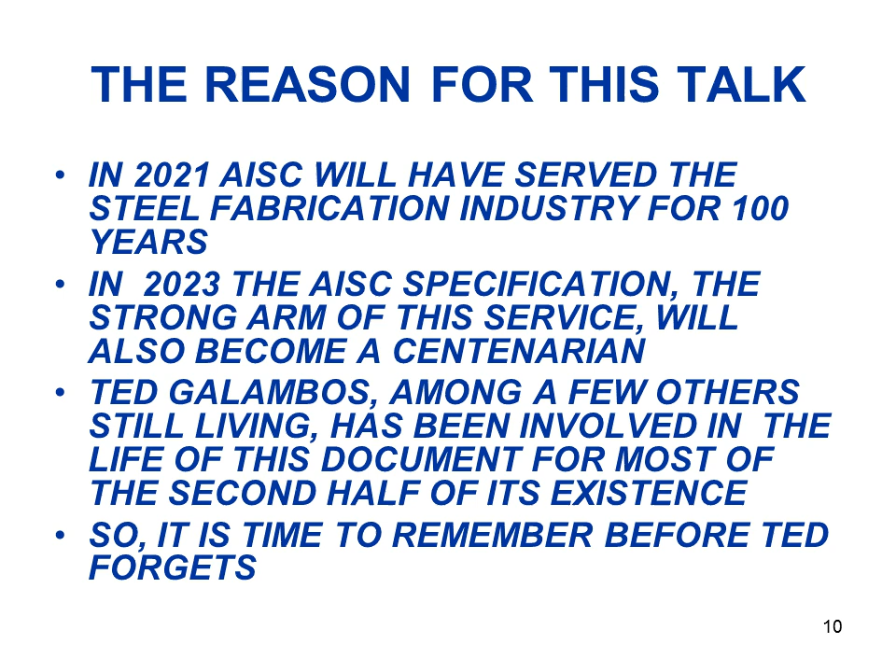As you can see, the time is creeping up on me, but I'm still smiling.

The story starts on September 1, 1956, when I reported as a graduate student at Lehigh University to Lynn Beedle. John Fisher and I met at 8 o'clock in the Fritz Lab parking lot and reported to Lynn Beedle immediately up on the 5th floor of Fritz Lab. And that began my involvement with the AISC specifications.

The reason that I was selected for the graduate work was that in my resume they found that I could speak, read, and write German. And they needed the translation of the recently appeared German buckling specification in preparation for a new AISC specification, and I guess a background for introducing effective lengths. So here I am, somewhat of an institutional memory, an old guy trying to remember.

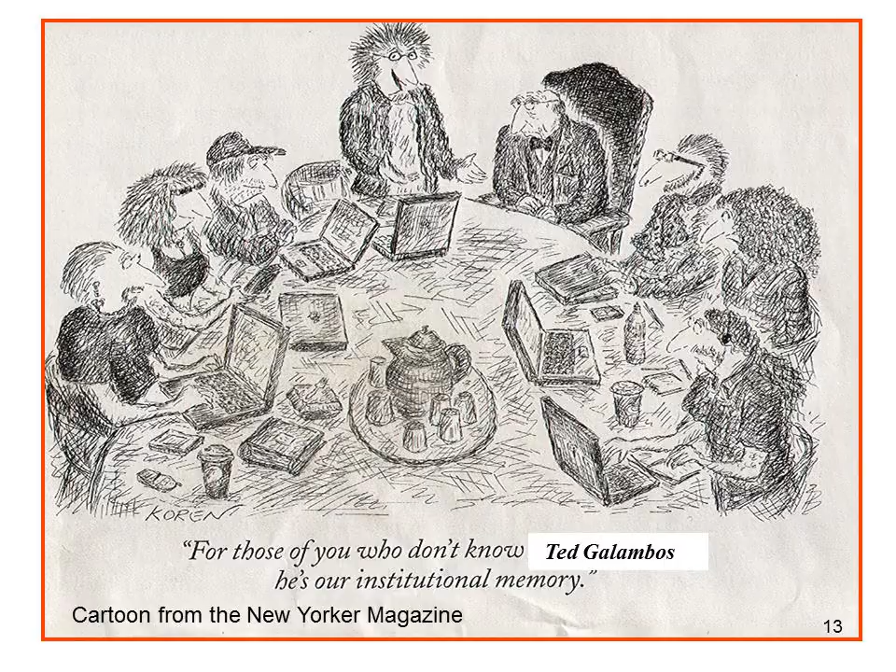Now, why was it important to have a new specification? It was an important fact because the Secretary of Commerce wrote a very nice letter to AISC on the formation of the institute, and this was Herbert Hoover, who eventually became president, and he was, of course, also an engineer. The inaugural meeting listed the following objectives: the establishment of a single code authority that would be recognized by building code authorities and designers to eliminate the confusion that existed in the construction industry caused by the numerous and different manuals, each containing proprietary information.

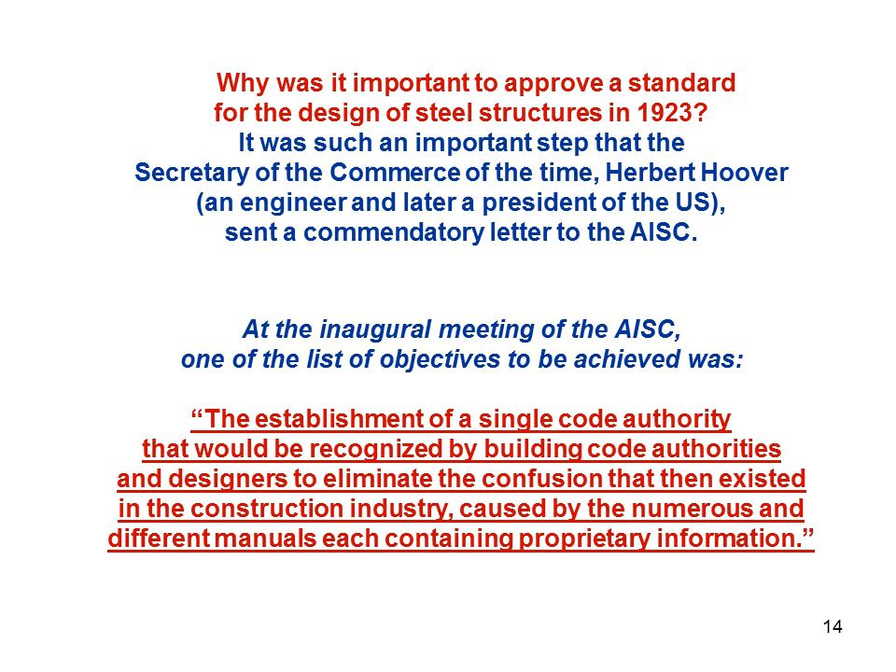Somewhere in my voluminous library, I have a whole number of these. The first AISC specification was a pretty little document contained in a little pocket volume that had 23 pages, and it contained the steel design spec, the ASTM spec, and design aids. The actual spec was 9 pages, and it cost 25 cents. So it was a real deal.

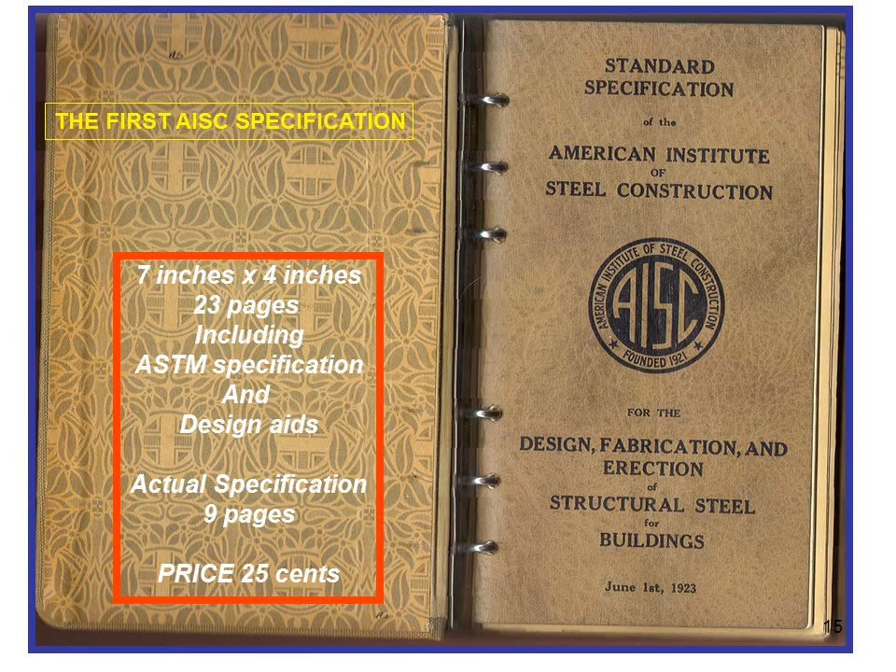Now, the specification was written by 3 groups of people: 2 professors, 2 structural engineers, and an architect. And I think the further developments with an advisory board for the specifications kind of represent the same kind of a distribution.

The specification was, in today's language, I would say, a true performance-based specification. The requirements for a satisfactory structure were: the material must be suitable, of uniform quality, without defects affecting the strength or service of the structure. And the computations and design must be properly made so that the unit stresses specified shall not be exceeded, and the structure and its details shall possess the requisite strength and rigidity. I wonder if we really would need any more than this.

Now, at the time this was written, a lot of things that we now know and use had already been developed. The mathematics was already in place over 100 years before that. Theory of elasticity was 30 years before that, and a lot of the theorems, Betti's principle, and all of those things were known. So we were not talking about starting into the jungle from the beginning.

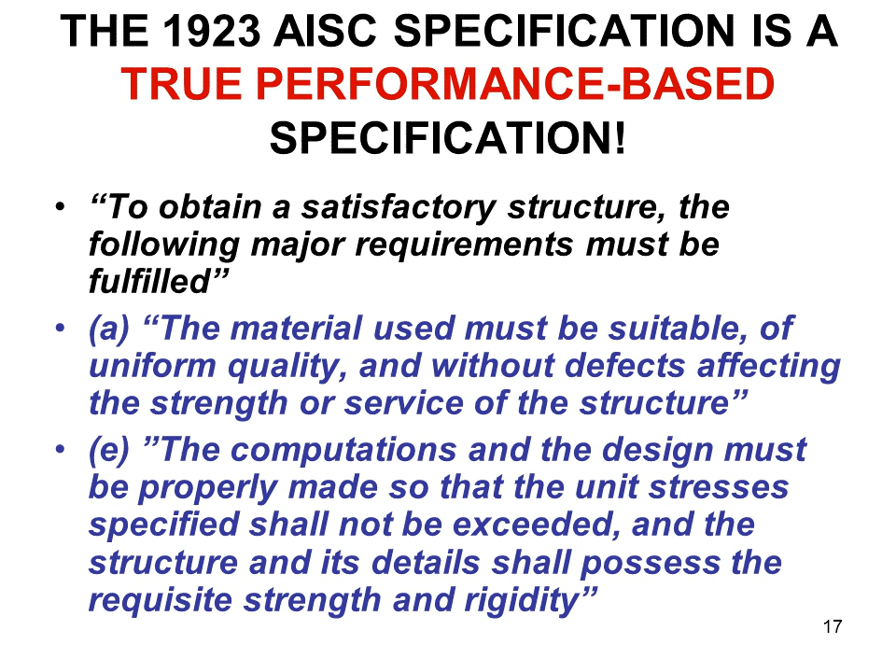The major headings of the spec are very familiar to what we have now: beams and girders, combined stresses, rivets and bolts, connections, lattice, minimum thickness, and so forth. So the outline was already here for what we now have in our specification.

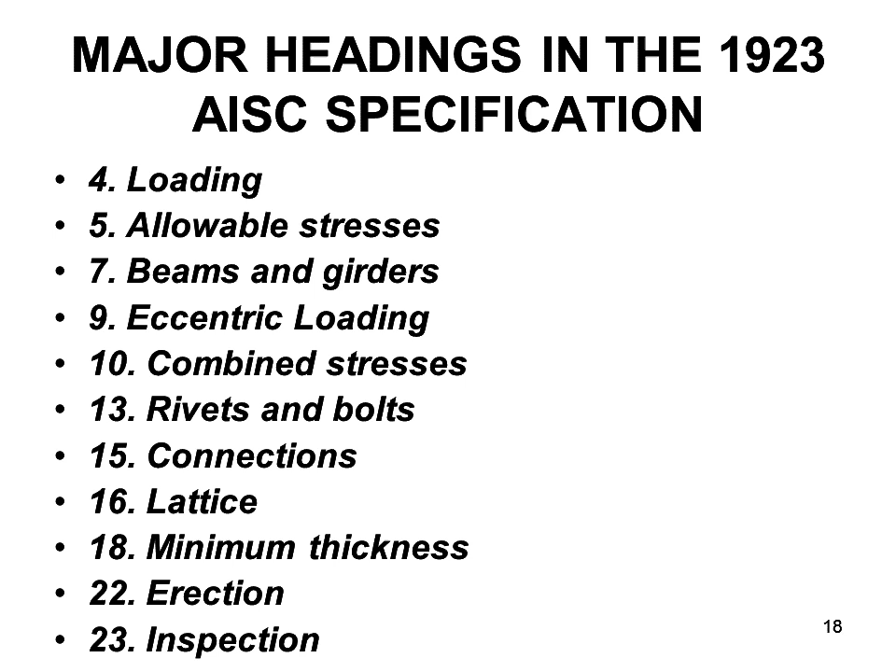About 7 years later, the AISC put out its first manual, and it contained the specification, but it also contained a lot of tabular materials for cross sections and sort of a textbook explanation as to why some of the rules were in the specification: beams, columns, and so forth. This cost $2, and it was 476 pages long, so it's not that much different from our present manual.

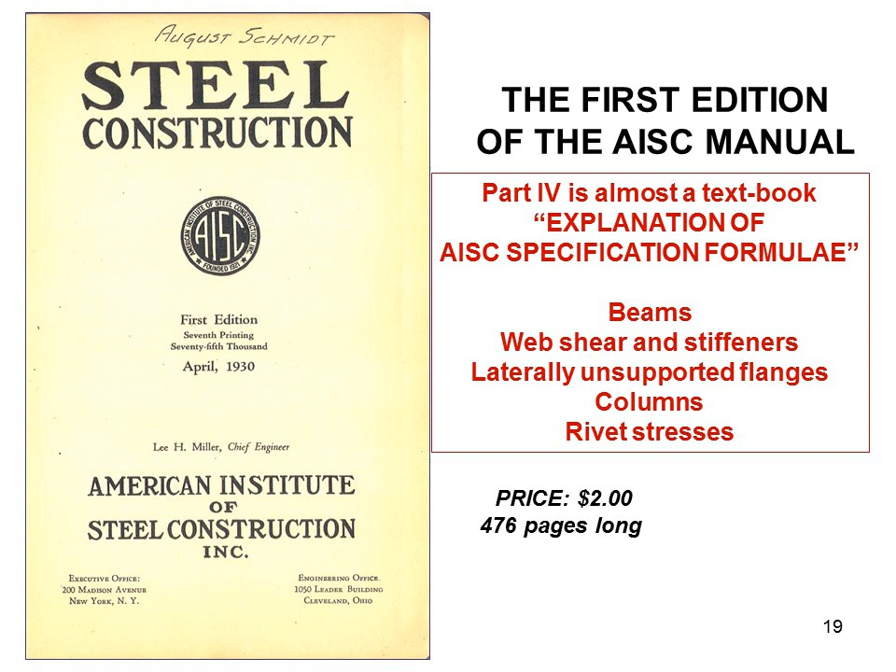Well, it's about half the thickness, okay?

The main argument for a new specification was that everybody did what they thought they wanted to do, and the main problem was that there was a bunch of column curves and column formulas in use, and depending on where you are, the strength was different by about 10 KSI. The book says very clearly that the diagrams clearly illustrate that the basic unit stress is not a consistent index of the so-called factor of safety. You can already see that they called it a so-called factor of safety. This carried over into a lot of other things that were used in design.

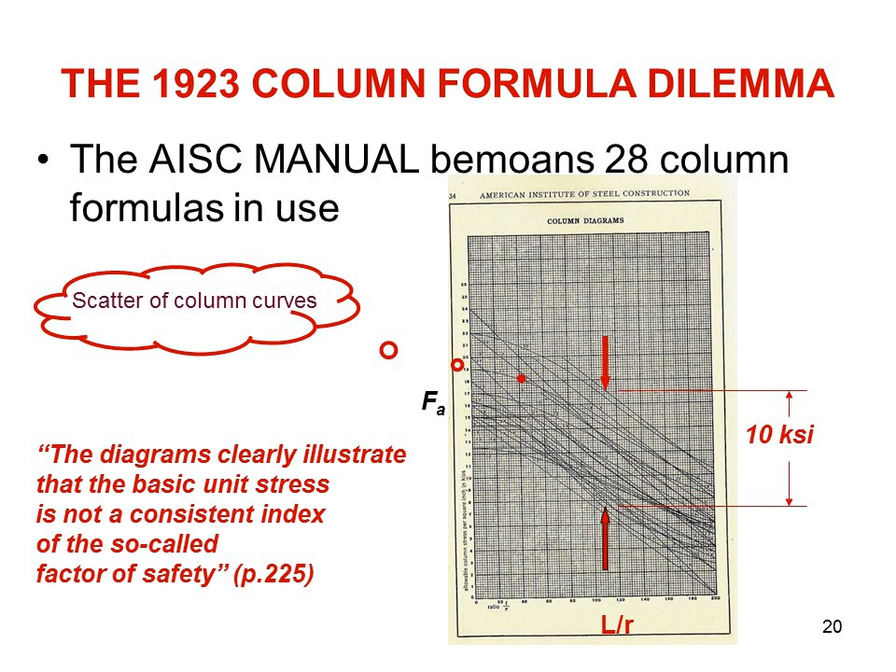Let's look at the development of the column formula that was used. The first column formula is shown here, and it was in use maybe pretty close to 50 years. It was developed first in the middle of the 19th century in England by Rankine, and the limit state was the attainment of first yield of a column with initial imperfections. Below an L over R of 60, you didn't worry about column strength, but worried about local crippling. After that, you have this column strength.

If you would scoff at the idea of this as a limit state, I would like to tell you that the limit state that the European column formula is based on is exactly the same limit state as was produced by Rankine in the 1850s, and it certainly does not reflect the work that was done later on to the tangent modulus solution and the nonlinear behavior.

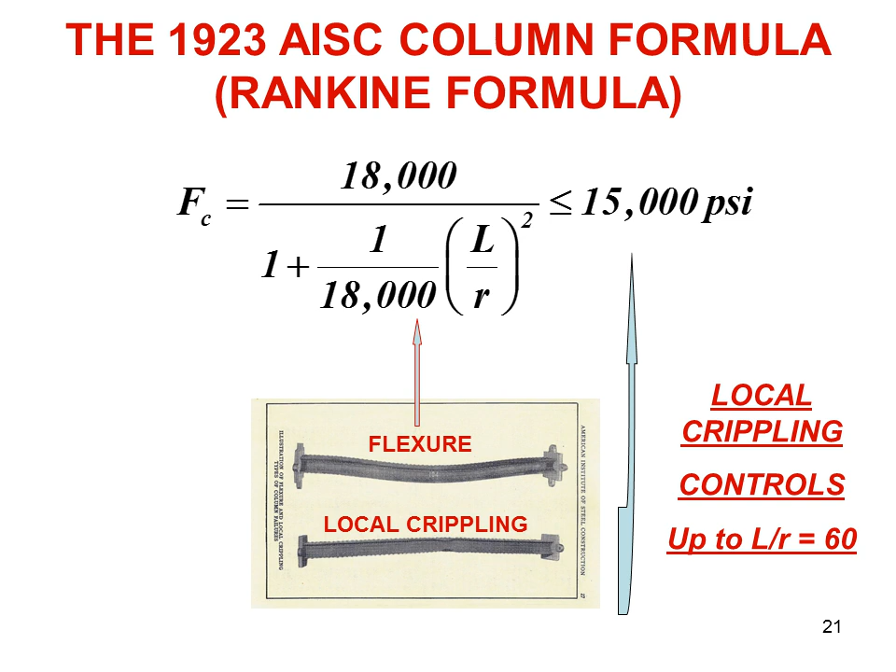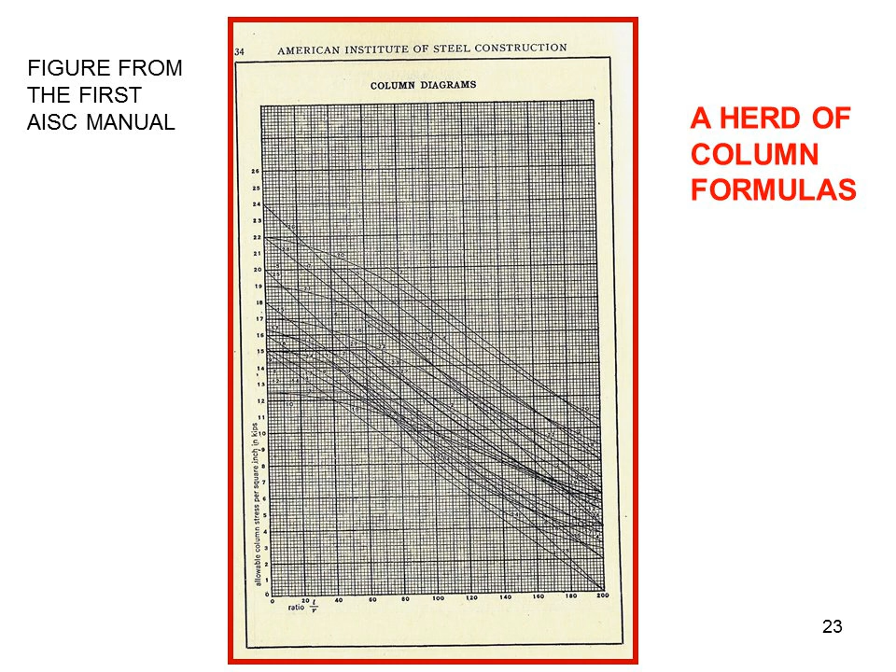Here you have just a picture of the two columns. They're all nice riveted columns and look kind of interesting. And here you have a bigger picture of the herd of column curves. Just imagine how much fun it was to teach that.

Now, the major changes in the specifications are shown in red here, and the changes were due to the need for new technology, new practices, new research.

In 1961 to 63, there was a radical change. I say 61 to 63 because the 61 specification had some things that had to be corrected, so the 63 specification in the light brown cover is the one that really counts.

This was a radical change because a large committee was formed and locked up at a resort in Michigan for a week. I wasn't part of this because I was still a little too junior for this. But this is where the research that had been done previous to this time in the 1950s and earlier at Lehigh and at Illinois was then put into the specification, and also to the chagrin of many, the idea of effective length was introduced.

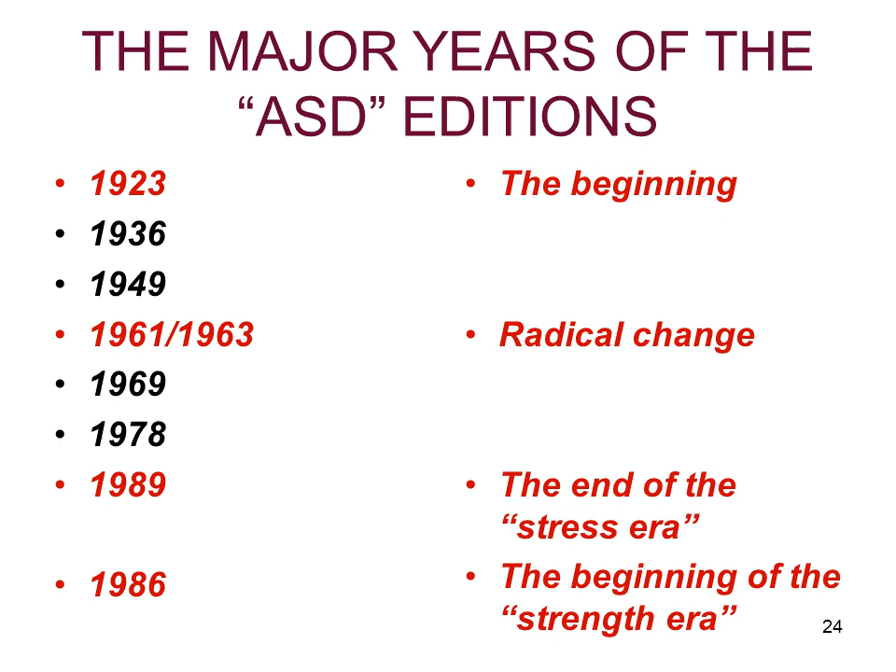And so I think slender is beautiful. The committee members are basically constant in number, and they're pretty much evenly distributed between professors or researchers, and fabricators, manufacturers, and consulting engineers. This is a very august group, and it meets twice a year, and its subcommittees meet more often. The main feature of this committee is that it's a consensus committee, everybody has to sign off. There's no possibility for saying well, 90% think this is safe and 10% don't. Well, this is not going to work.

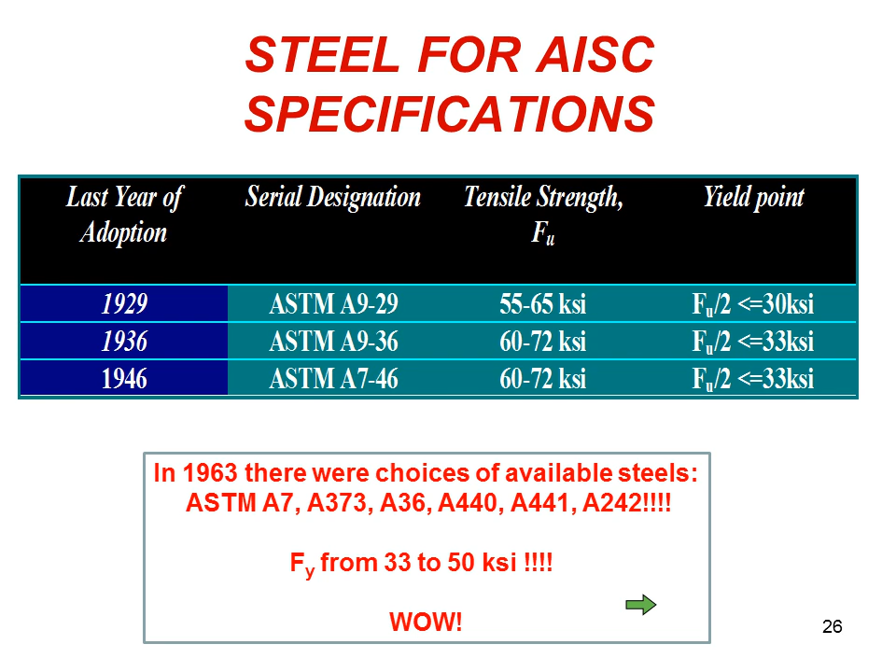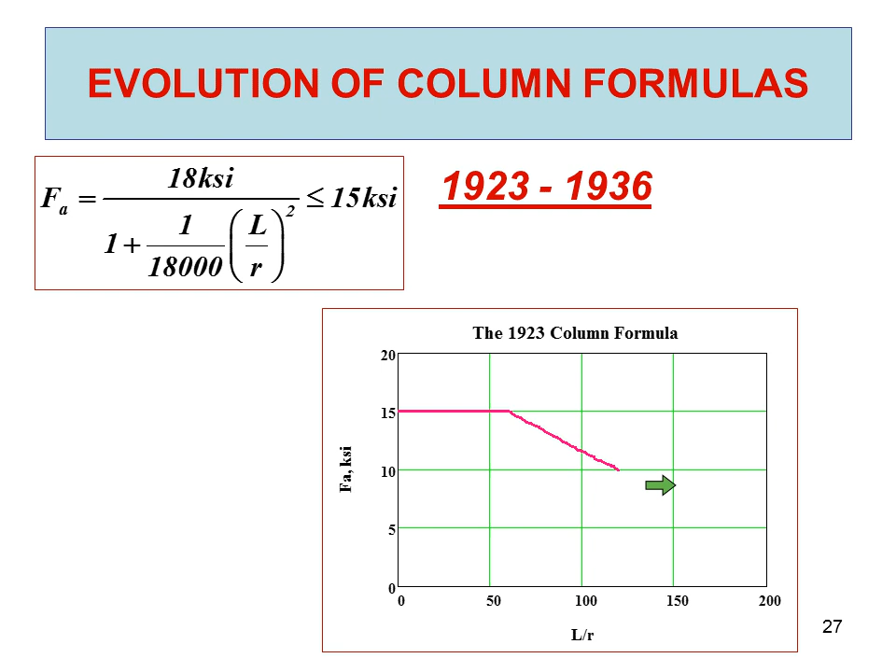So that was a very big introduction in '61. This is the column curve, as I talked to you before, and it was from 23 to 36. It was a very simple two-branch curve, and then this was changed in '36 to '61.

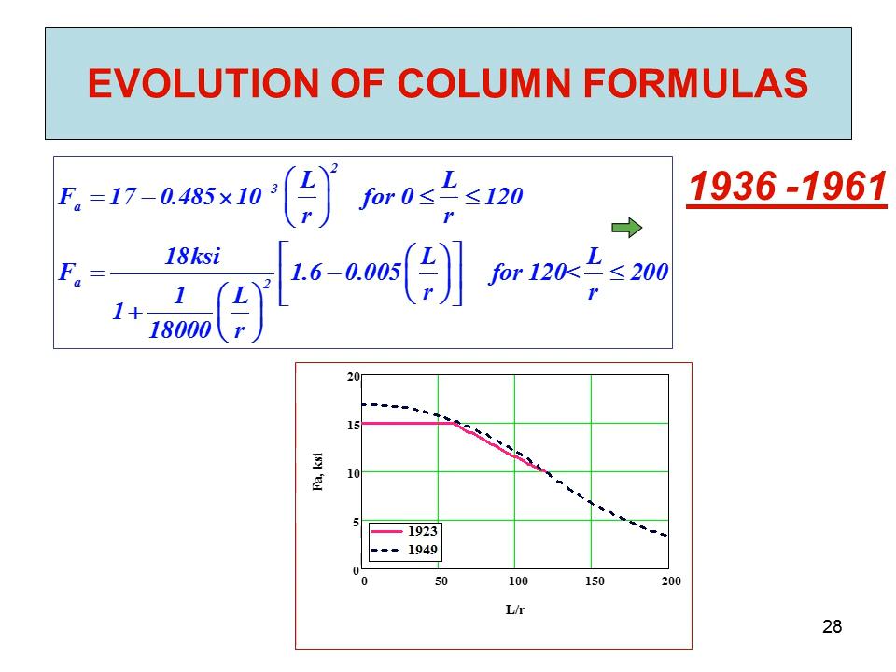This is what I learned when I was an undergraduate. We have a sort of a parabola for L over R less than 120, and then we have the Rankine curve with a little input, a little ice cream put on it. So between 120 and 200, and we called this secondary members and this primary members. Now we've gotten away from that, and we don't do secondary and primary members anymore.

That's the basic member that was used, and this time it wasn't just a formula cooked up by researchers - there was also a pretty extensive experimental program that went with that at Lehigh University. So this took care of the material nonlinearities, and in hot rolled steel, this was the residual stresses.

The factor of safety varied from 5/3 to 23/12, and it was supposed to empirically take care of initial imperfections. The origin of 23/12 is pretty obscure, but maybe it could be found in the book of Numbers in the Bible. I don't know. But that's where most of us learned and taught.

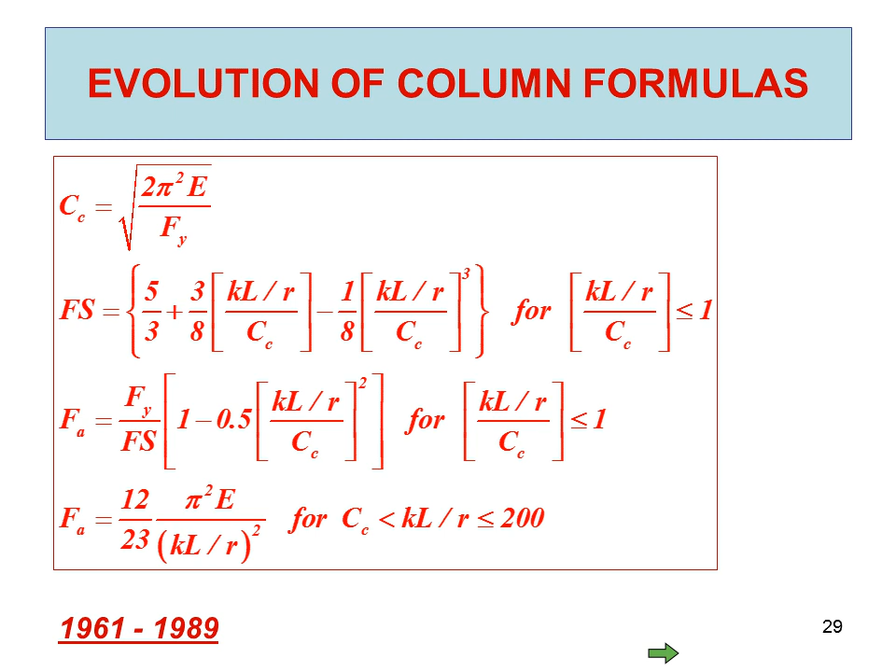Now here you see the comparisons between the 1936 and the '89, and then our present column curve. The present column curve takes care of both initial imperfections and the residual stresses, and it is based on research that Reidar Bjorhovde performed for his PhD thesis at Lehigh. It is the average curve for all of the tests that were performed and then reanalyzed. The simple formulas we ended up with are due to Ray Tide, who came up with the formulas we're using. So that's where this is.

Column curves, of course, are very important. They are like a flag in a country - a new country always starts with getting a flag and then getting a column curve. It's also very important to note that the British had a different philosophy and different column curve in 1939, and the Germans had again something very different, and they went to war with each other, and you figure that out.

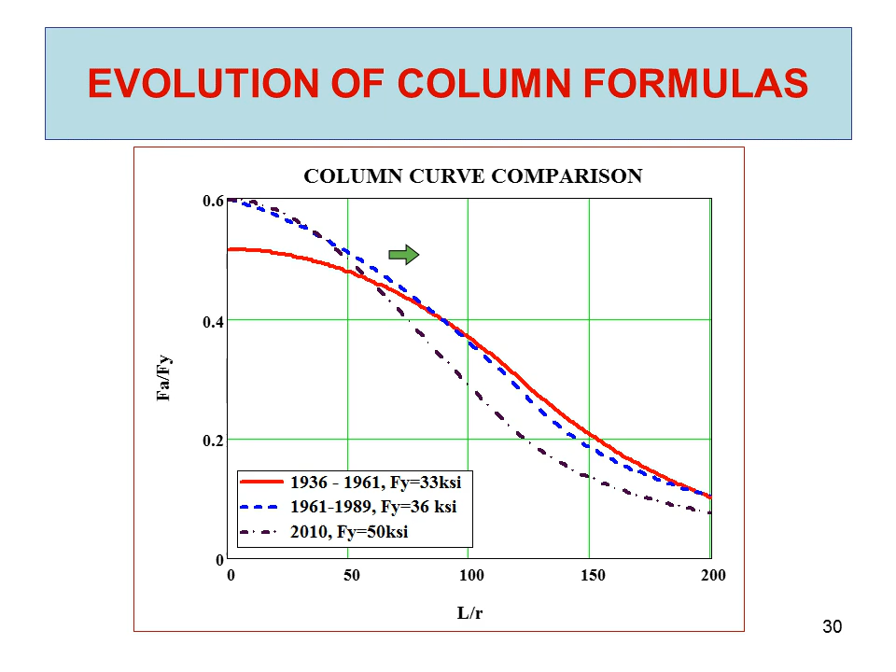Okay, now let's look at lateral torsional buckling rules.

It started out with the Rankine formula with a little bit increased beginning allowable stress. Then it was increased a little bit more to have more confidence in what was done.

And then in 1949, a new column formula was introduced, and that's the LD over BT formula. This was as a result of research conducted by Carl de Vries at Bethlehem Steel, and his paper in the AISC specs, the AISC Structures Journal, is quite an interesting version of exercise, and it's quite convoluted, but he came up with what turned out to be one of the right parameters.

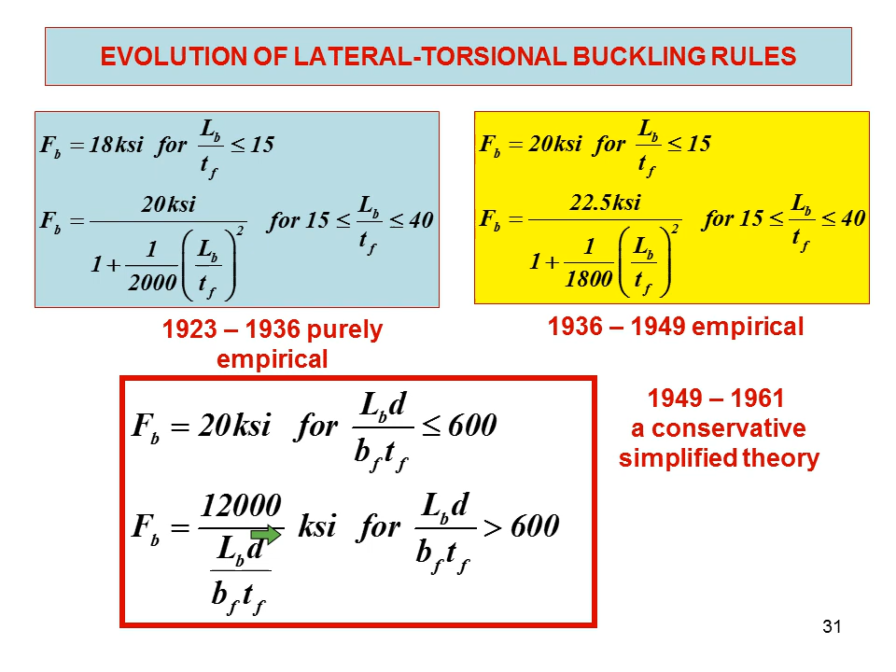And the result was that we really had a very, very conservative situation on our hands.

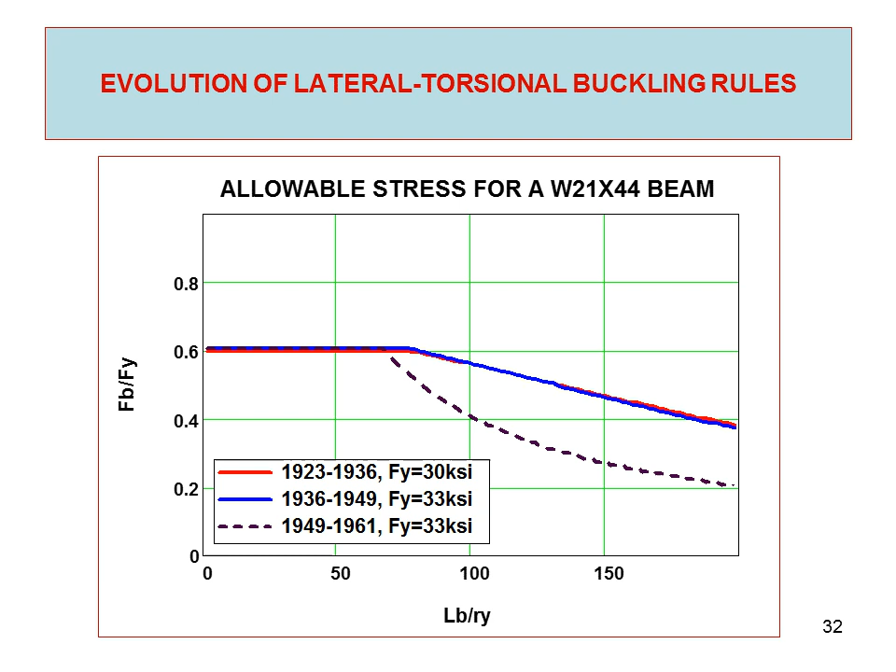Now our friend George Winter at Cornell University, he was a member of the AISC Specification Committee, and he was very, very astute and had this gruff old Austrian accent. And he said, now just wait a minute, Timoshenko had all of this figured out a long time ago. And he referred to Timoshenko's book in 1936.

And here you have the elastic buckling formula that we are now using. Some of the numbers were substituted in there, and so but this is it. And you can take this apart into two stresses, the St. Venant buckling stress and the warping restraint buckling stress. And if you do a little cooking around and substitution, you get these two formulas.

This is the Euler formula. This is the LD over BT formula. And if you just take that and take 6/10 of it for the yield stress, there you are. George Winter was very kind to point this out to all of us.

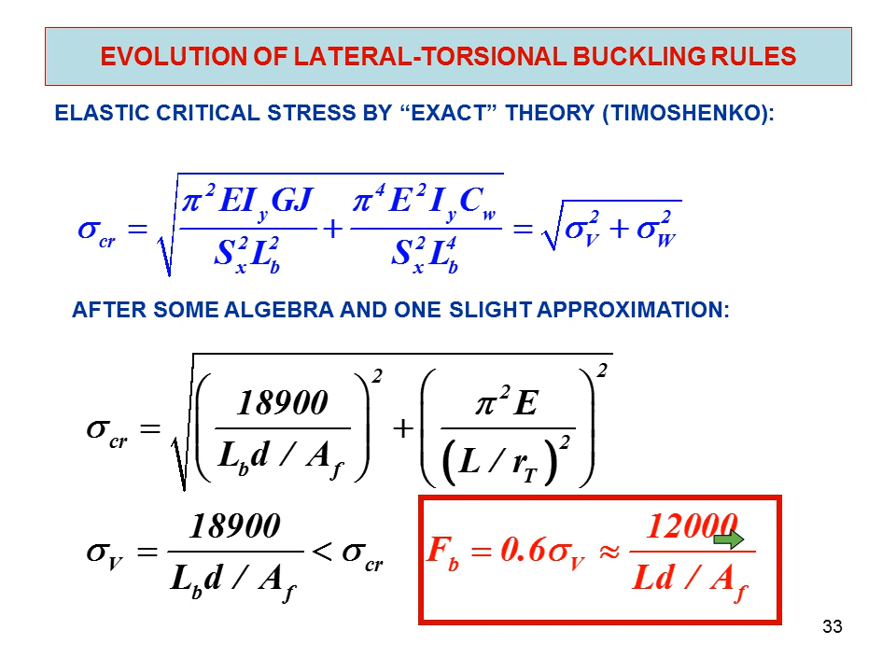Okay, now this was then put into the new equation, a new specification in '61, and here you have the LD over BT formula, and here you have a parabolic formula, and then we said, okay, we'll take the maximum of these two, which will be less than the square root of the sum of the squares.

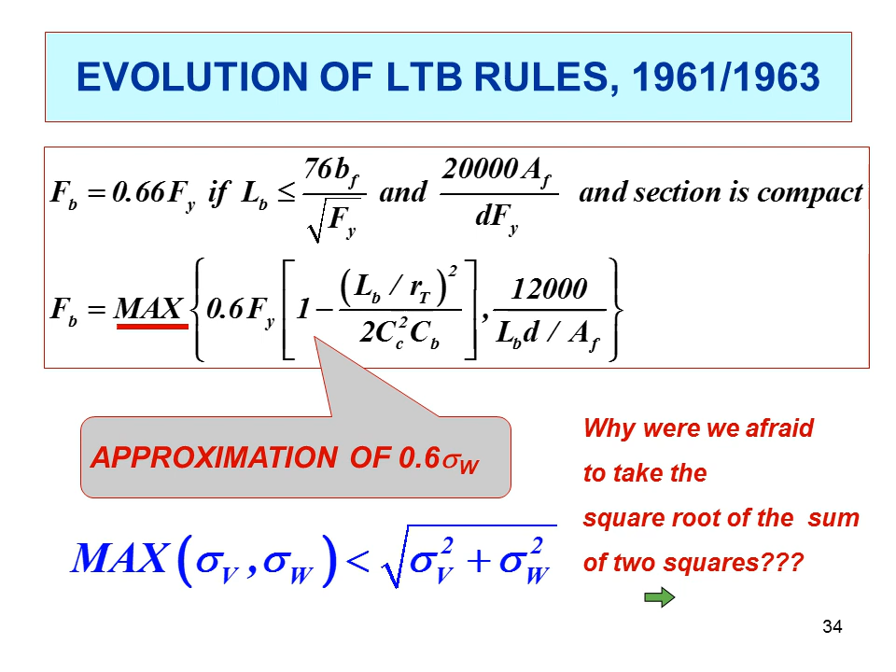So why we were afraid to do that, I have never known, and it was a heck of a difficult thing to convince students that now this time you use the maximum rather than the minimum. And you know, the slide rule would have done this very nicely.

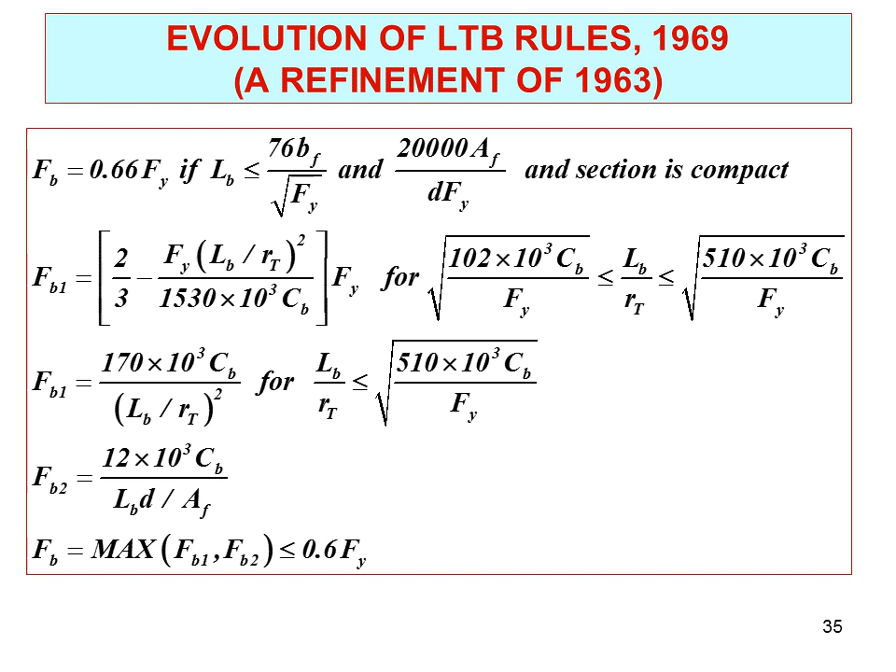This was then further extended and evolved, but it still stayed the same until 1989, and it was changed in the 1986 LRFD formula, and of course we're not using this anymore.

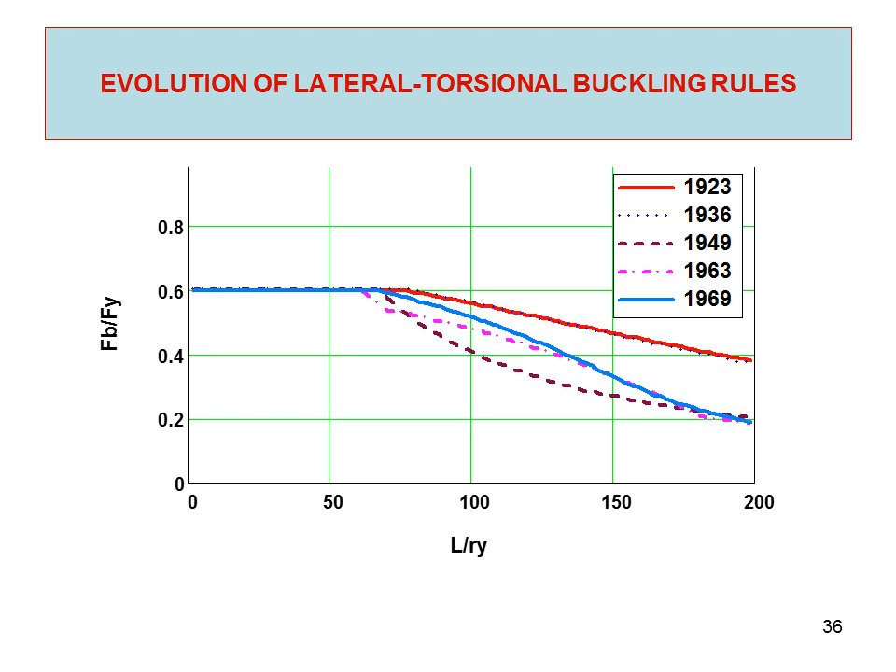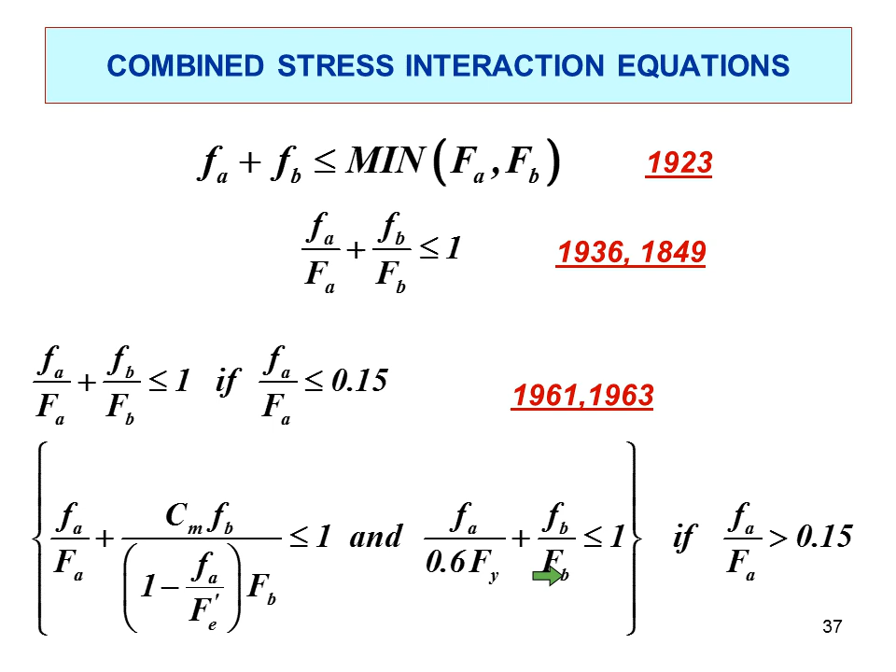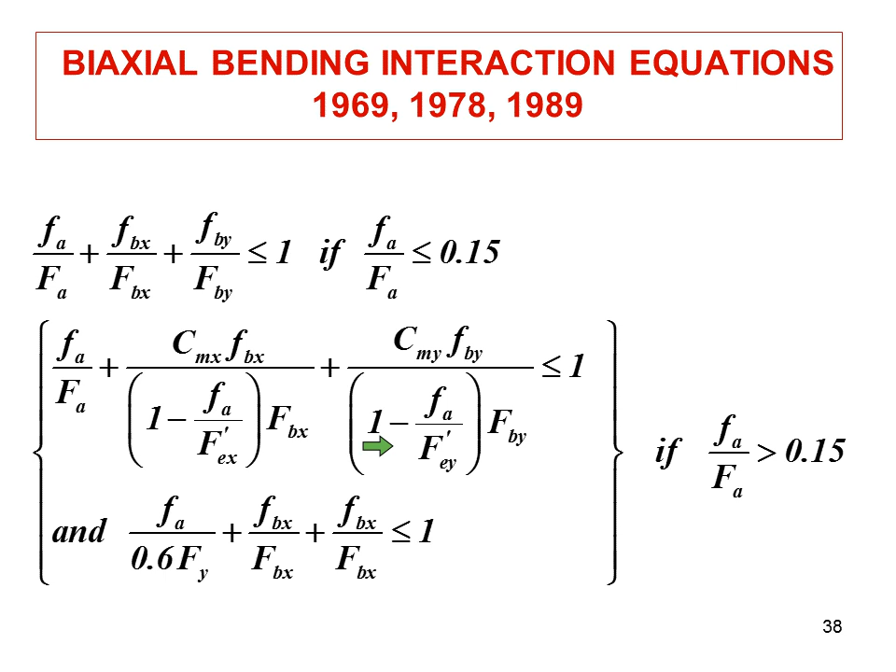This was extended to the biaxial case, and that's what we ended up with in 1989. Okay, let's look at some of the other things that have changed.

The slender cross-sections were introduced in 1969, but before that we had B over T of 12 first for beam flanges. Then in '36 we went up for beam flanges to B over T of 16 and H over T of 40 for webs.

And then we kept the same limits in '49, but we chopped off for our cross-section calculations the parts that exceeded these limits. So it was kind of a butchering of the cross-section.

In '63, we left the same limits, but accommodated the other steel grades. In '69, we introduced the Q factors for the effective width, for the unstiffened elements, and the effective widths for the stiffened elements, and that we took over from the cold form specification.

Now, I kind of enjoyed the Q sub S factors and so on, but progress moves on, and you can go to the funeral of the Q sub S factors in the 2016 specification. It's done.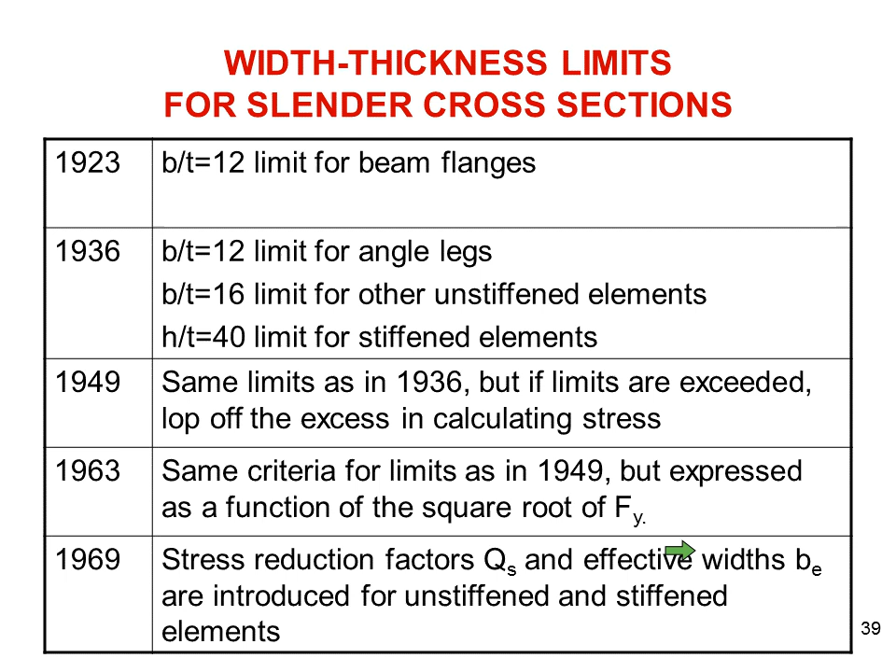Other things that changed: we had a 1/3 increase of the allowable stress for wind, and then later earthquake too. That has disappeared because of the load factors in AISC 07. Fatigue came in at '36, and there was a great deal of research at Lehigh with John Fisher and his colleagues.

Plastic design came in '63 in a real big way, not only as a separate section, but also in the permission of moment redistribution and in increasing the allowable stress. Types of construction included simple, rigid, and semi-rigid.

Ponding was asked to be taken care of, and a lot of help was given in the specification because of some failures, and the same for vibration. But vibration, it was basically said: okay, you take care of it, we're not responsible if your floor wiggles too much.

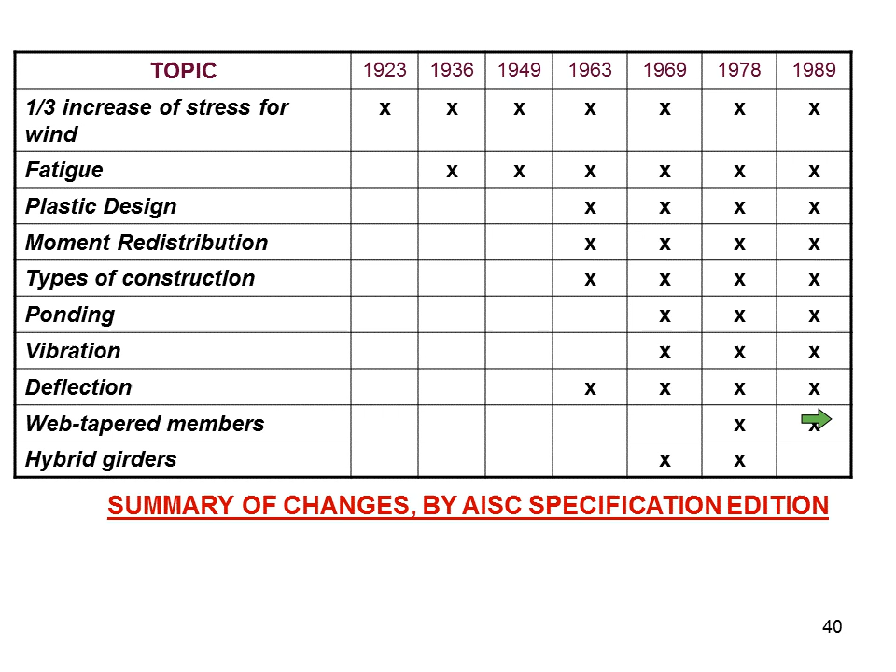Composite beams, as we understand them, came in '63, although encased beams were treated before that. Incomplete composite action, which gave you a lot of economy, came in '69 as a result of research, and then metal decks came in '78.

Welding and high strength bolts came in '49, and friction connections and so on. This stuff is mainly due to research at Illinois and at Lehigh with John Fisher and his colleagues, John Rumpf, on the bolted connections, and there were some huge connections tested in the 5 million pound testing machine.

In fact, when those connections went, before that we had to get out of the building before the exploded energy was released. It was quite a big bang.

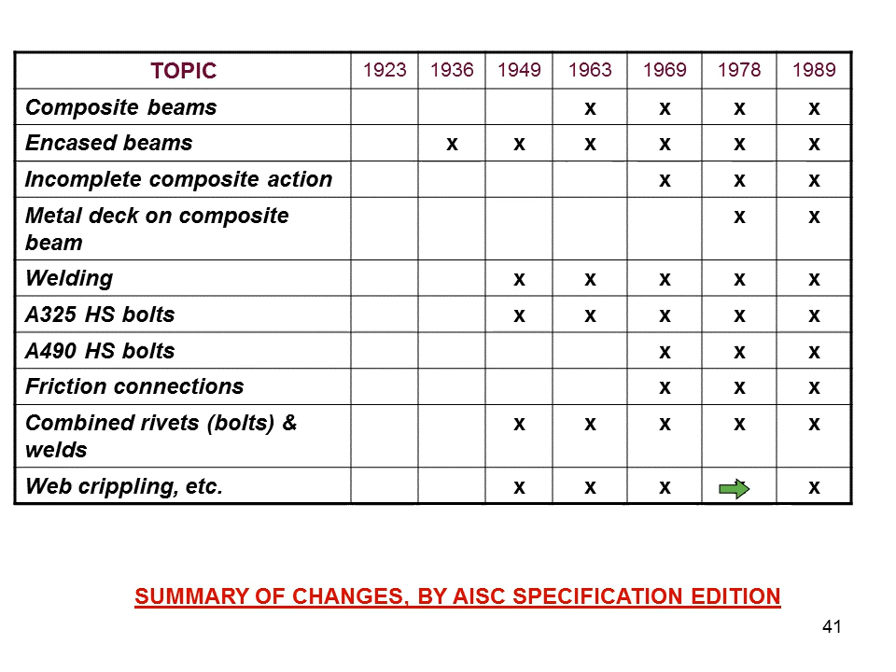I remember all-night, 24-hour-long sessions manning a manual hydraulic pump while the axial load was provided by the 5 million pound testing machine.

The plate girders went from riveted plate girders to welded plate girders, again as a result of a major project at Lehigh with Konrad Basler and Bruno Thurlimann. Konrad Basler is still active and living, and he was quite a guy to supervise this work.

It was interesting to see during the fatigue tests the breathing of the webs. It's like a running dog. It was a real interesting thing.

Of course, these standards for riveted plate girders were very, very conservative. And here the unspeakable thing happened: the elasticians would turn around in their grave, that we permitted buckling and used post-buckling strength. Block shear was a result of failures.

Compactness limits also came in, a very handy thing. And then you have block shear. We had torsional buckling, and of course including work on angle beams and angle columns. The angle beam work was done by Max Lay and John Lee at the Broken Hill Proprietary Company in Melbourne.

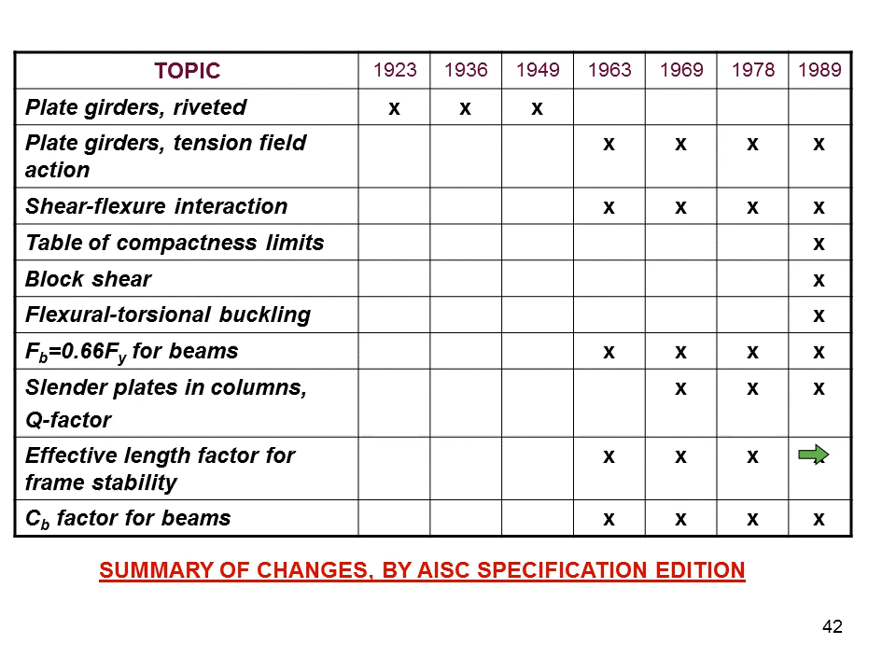C-sub-B factors were introduced here also. Anyway, this was just a small view of the original plate girder design, where you choose whether you need stiffeners and the spacing of stiffeners, and then the allowable stresses.

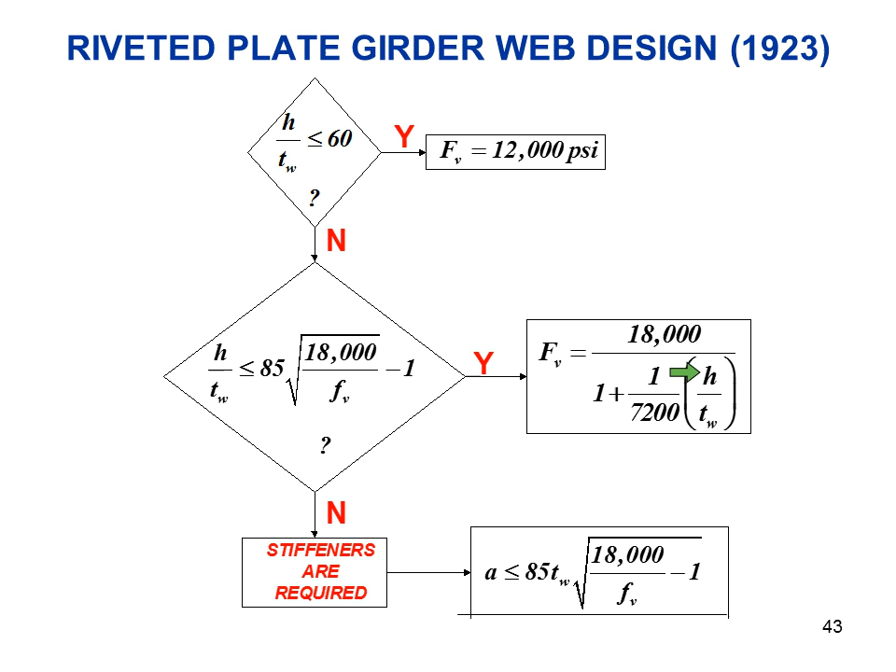Now, AISC from the very beginning had a great deal of interest in research. If you ever get a hold of this book, The First 60 Years, it gives you so much of the first 60-year history. Anyway, they were interested in fireproofing, welding, bracing—that's a subject that's been around a while.

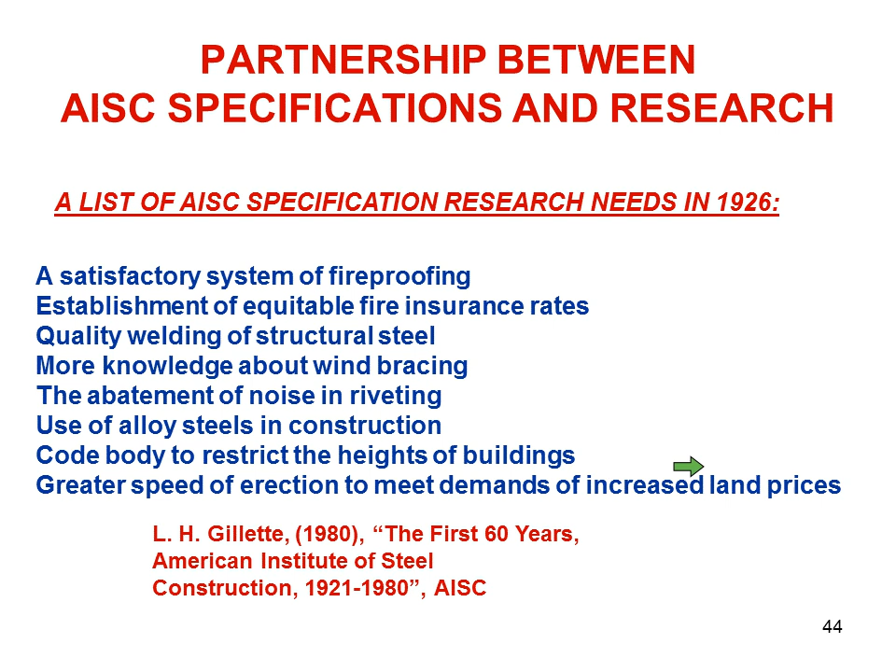Then different types of steel, and then political things. The noise abatement of riveting, I guess that just irritated a lot of people—it's like a vibration, jiggling the teacups. So height of building restrictions is again political, and speed of erection was also a political thing.

But the motivations for change—you can see here you have industry motivation: composite design, high-strength bolts, welding, connections, different steel grades, and so on, came from industry. Academia came with plastic design, stability criteria, computer methods, direct design, bracing rules, plate girder design, fatigue, fracture.

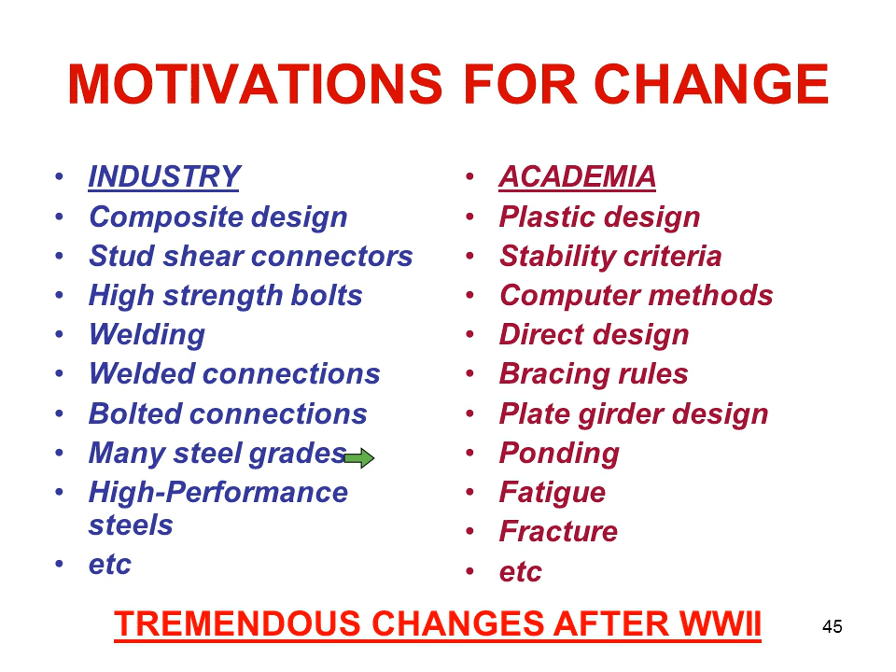Ponding actually should be over here, because the research was done by AISC, one of the AISC engineers. So you have the two paths, and this is still active today.

The example I'll give is that composite beams came into being in the 1930s already. In fact, a number of bridges on the German autobahns in the 1930s were composite beams.

After the war, there was research at Illinois and at Lehigh. At Illinois it was mainly Ivan Viest, who was also a member of the AISC committee, and at Lehigh it was Bruno Thurlimann. Charlie Culver, as an undergraduate, did a tremendous job of refuting the Illinois gospel of an elastic cross-section, while the Lehigh cross-section was the plastic moment cross-section.

Then the big occurrence in '59-'61 was the AASHO Road Test at Ottawa, Illinois, where a battalion of soldiers from the transportation service spent a couple of years driving trucks over bridges and pavements. John Fisher worked there, Ivan Viest, my brother Charlie worked there, and I was there visiting once to see a composite bridge gradually sag as the army trucks went over slowly.

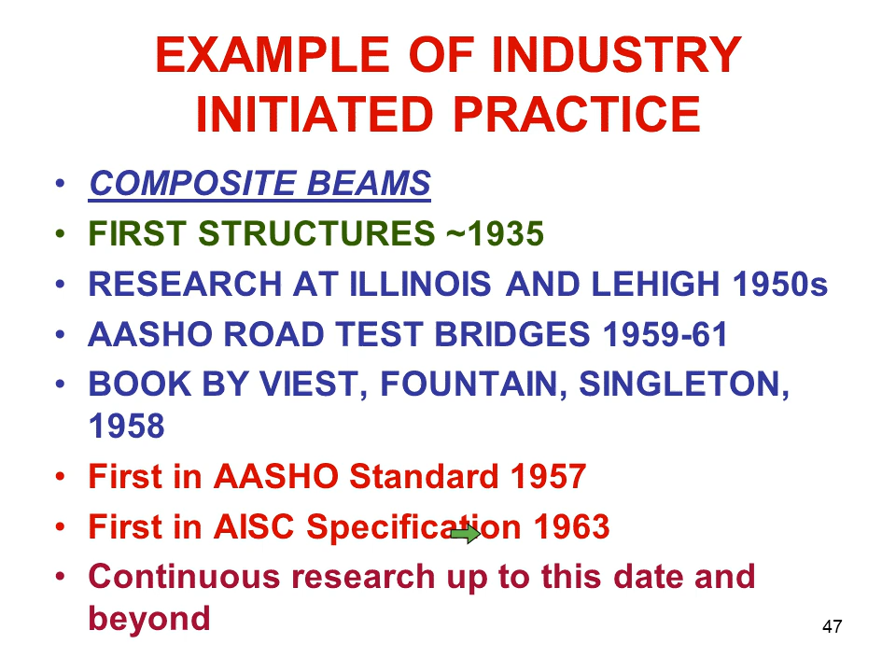And there was this book by Viest, Fountain, and Singleton. They made composite design popular. The first standard, AASHO, was '57, and the 'T' was added later. AISC specs came in '63, and this is still with us.

The last example I want to talk about is plastic design, which is new from the early 1900s. The first inelastic behavior was recognized for columns by Engesser with a tangent modulus in Switzerland, and then the first plastic continuous beams—or actually fixed-end beams—were tested at Budapest.

And the idea of a plastic hinge was proposed there. For those of you who know Hungarian, the title of the paper was Kísérletek befalazott tartókkal. So there you are—but a lot of good things came out of Budapest.

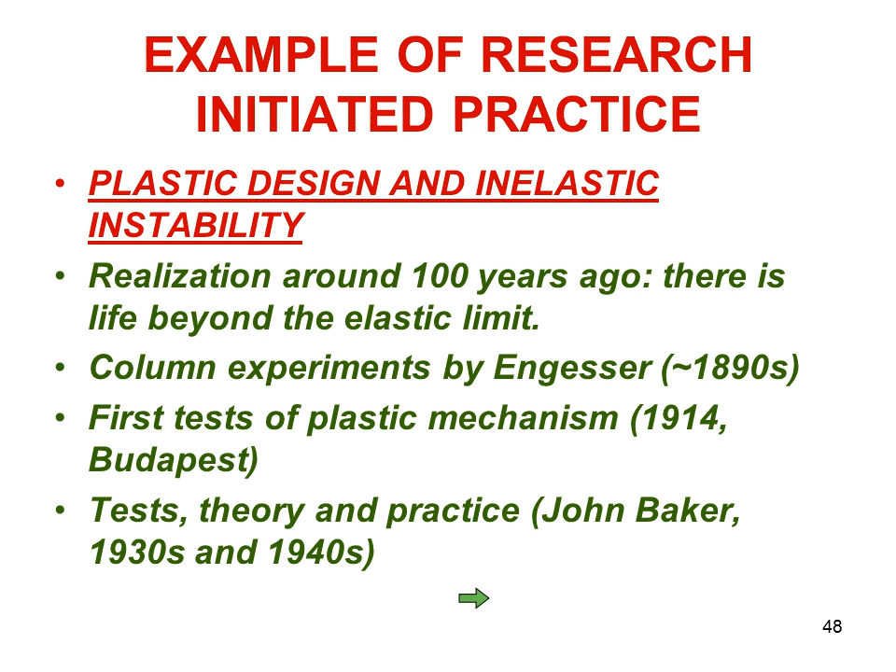Then in the 1930s and 40s, John Baker in England, at Cambridge, did a lot of tests on plastic design and on inelastic instability, got a specification, and built a building. He did all of this against some members of the International Association of Bridge and Structural Engineers—one of their speakers, a professor at the Federal Institute of Technology at Zurich, Stüssi, said that plastic design was for imbeciles and communists. So there. But plastic design was brought over by John Baker.

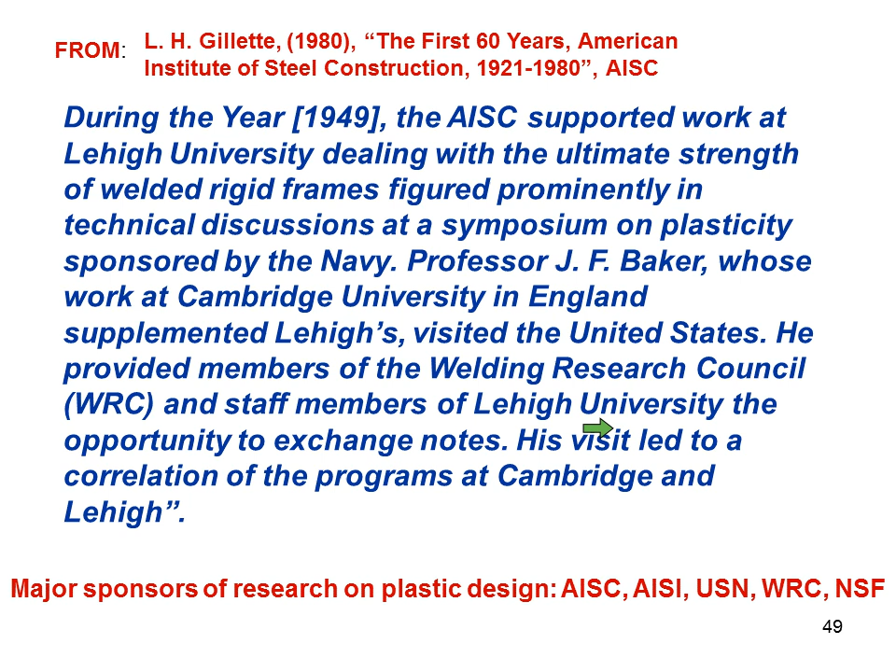In fact, he and Ted Higgins and Lynn Beedle—Ted Higgins from AISC and Lynn Beedle at Lehigh—brought plastic design to Lehigh and did an awful lot of research. Baker visited here, Lynn Beedle spent a year in Cambridge, and so did Bob Ketter, who was my thesis advisor. A lot of that work became part of the new specification.

What we learned in the 50s, 60s, and 70s is that plastic design leads to a better understanding under load, gives economy, and is beginning to be used more and more in seismic design. And even if you don't use it, you should study it, because then you won't be afraid of your structure.

That's my reason for teaching it. Inelastic instability is much more difficult, so you had to have a study of that with plastic design. Theory alone wasn't enough, or testing had to be part of the development. You can do all kinds of sins in the name of elasticity, but in the plastic range you have to test.

What was drummed into us by Beedle was that the results must be directed to usefulness in practice. We traveled many, many times from Bethlehem to New York, 101 Park Avenue, to talk to the Welding Research Council and to Ted Higgins, and it was a great life.

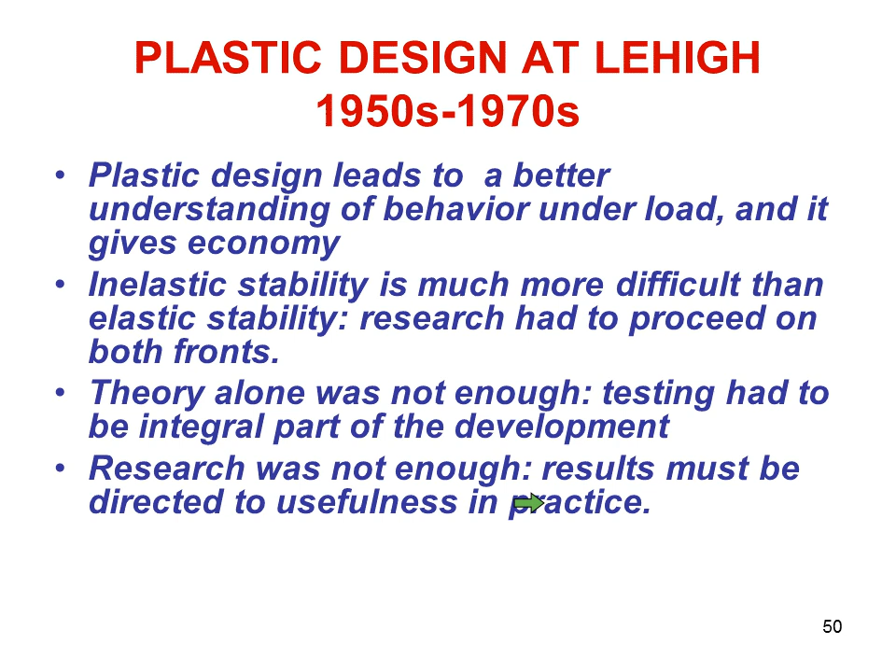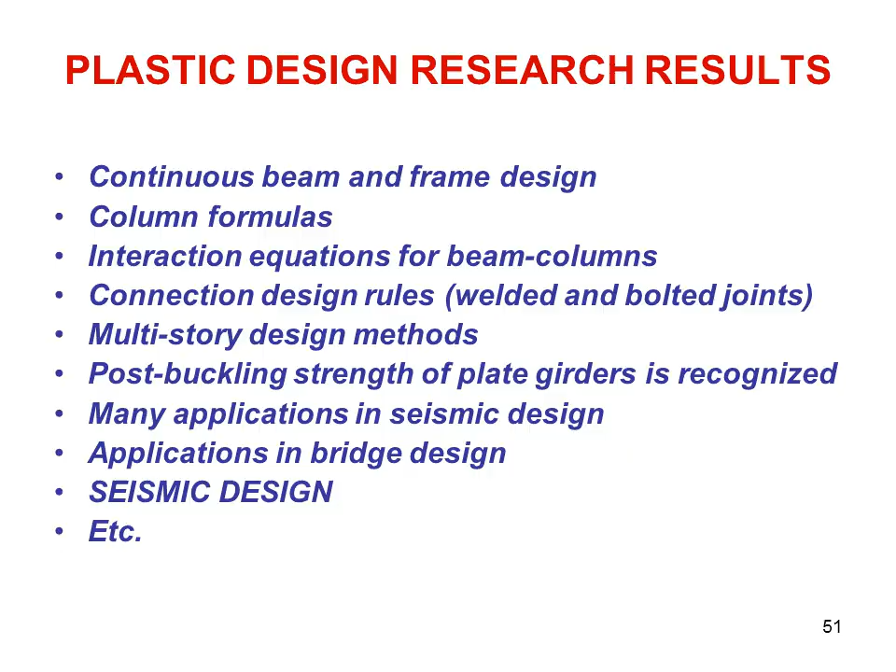I think there were many, many applications of this, and eventually, these are just a few highlights. We had frame tests, braced and unbraced frames. Joe Yura worked on this, and before that we had tests on gabled frames with George Driscoll.

We had two conferences at Lehigh where participants were involved with the testing that we did. I think Larry Kloiber is one of them who was there, and many of the others are still living who were there.

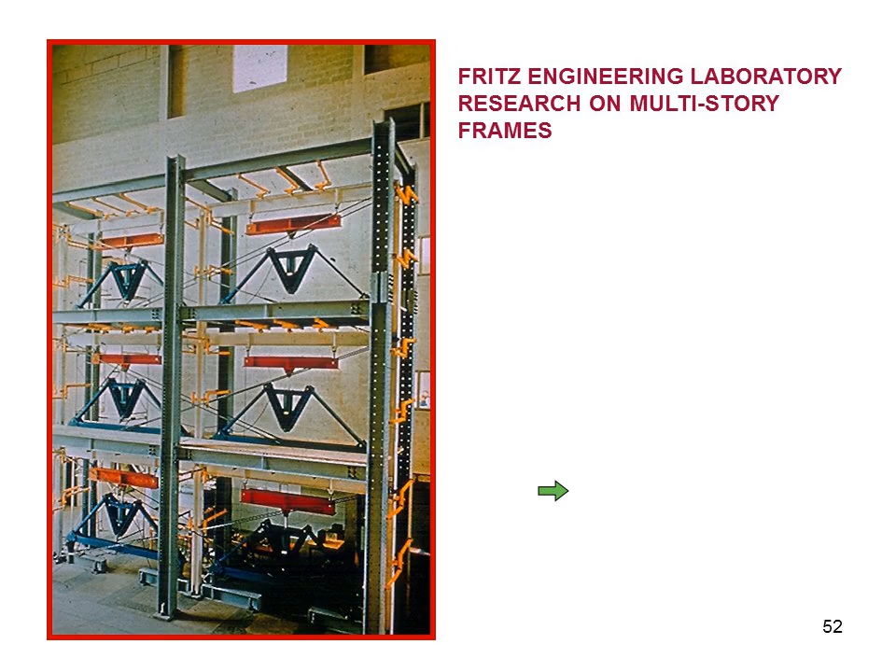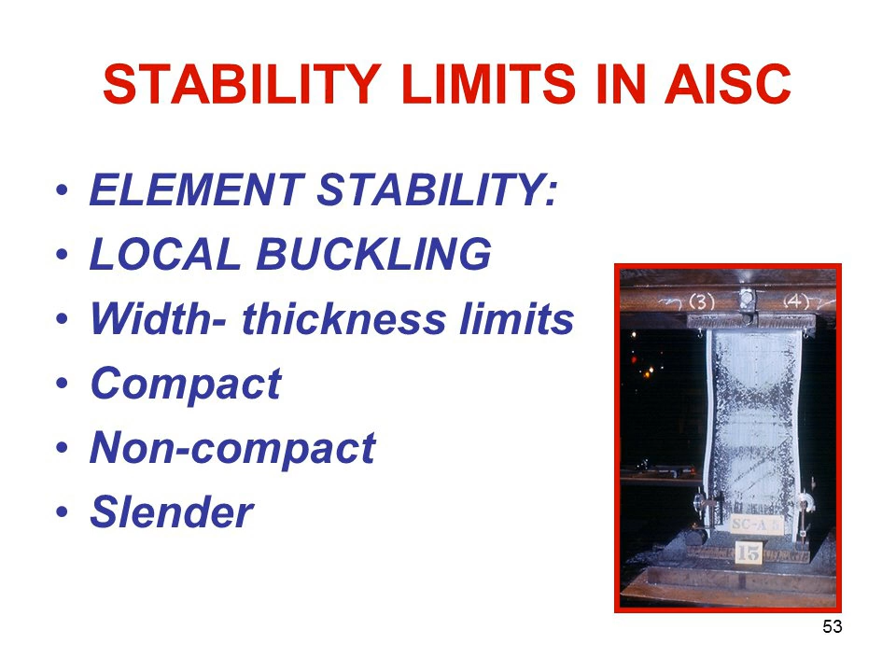Then we had element stability with thickness limits, Geerhard Haaijer's work, who was later Vice President of Research at AISC. Then I did work on inelastic lateral torsional buckling, and so did George Lee.

Frame stability and effective length, work by Bernie McNamee and Le-Wu Lu. It's kind of interesting to see a frame buckling. It's really neat.

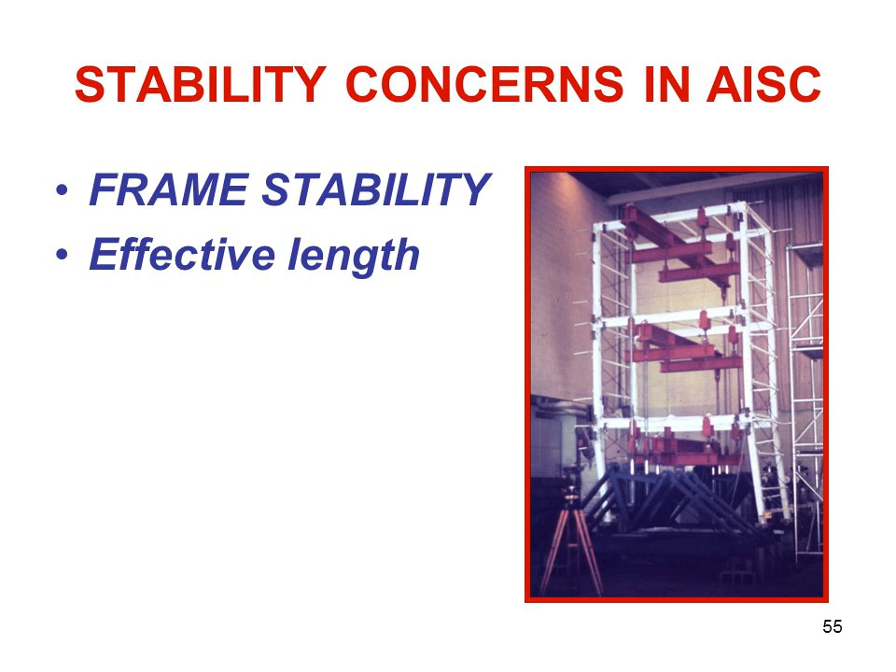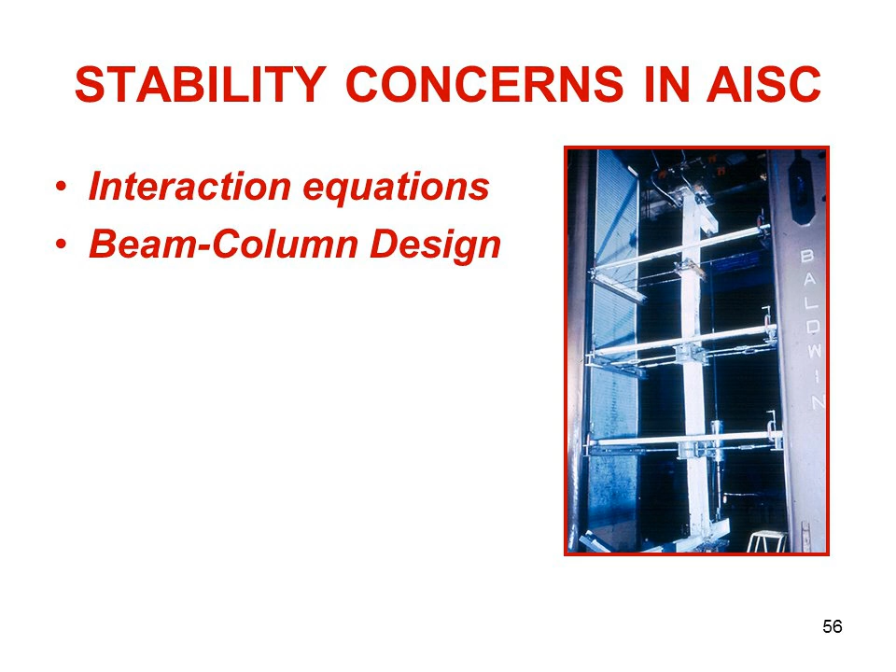And I did a lot of tests on beam columns, braced and unbraced, and with Max Lay. So that was sort of a life that we had.

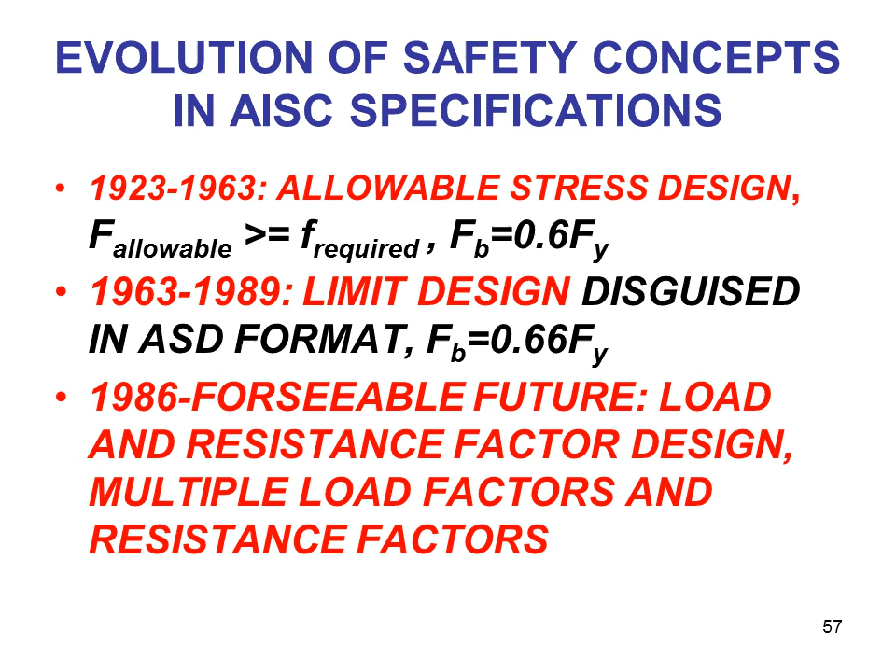And then, just briefly, I won't get into my hobby horse about LRFD, but I think that it was a great life and it was fun. And I want to thank you very much.